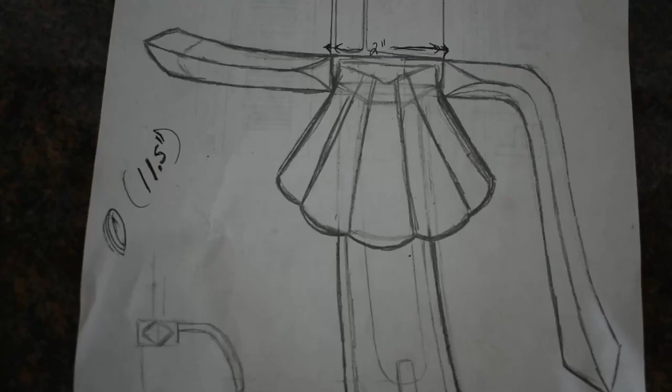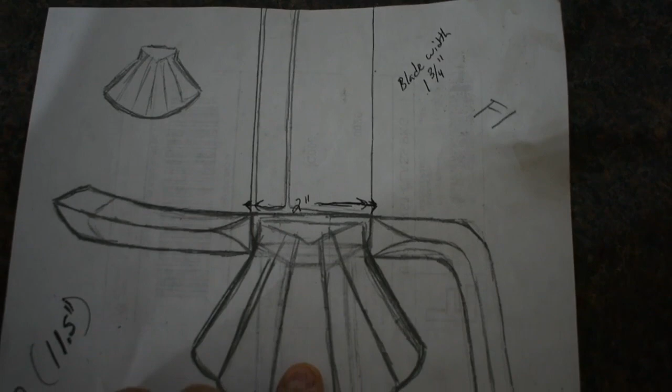Here's the guard design I'm going to use for the Messer sword. I've got a piece of 1-inch rebar in the forge heating up. The overall length of this guard is 11.5 inches, with the tang portion at 1 3/4 inches matching the blade width. This area here will be 2 inches. I'll do the clamshell later and weld it on, but that's the guard style we're going for. I'll probably forge it pretty standard square and then grind in the facet areas.

So that's heating up, let's get back out there, see if it's at temperature, and get to moving some metal.

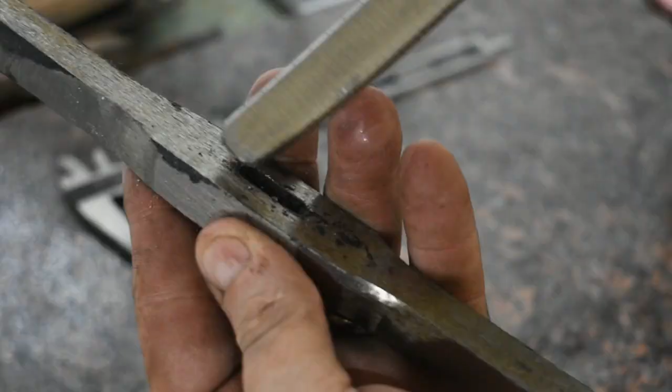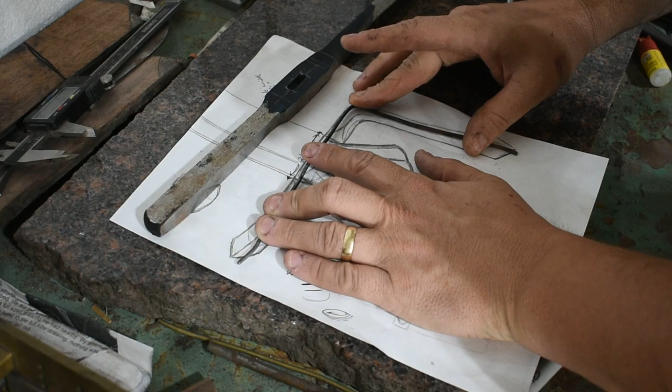Now that we've got the slot cut in our guard, I need to trim this to the proper length. I'll take this piece of wire and lay it on my drawing, bend it to fit the curve so I can get the idea of exactly how much material I'll need. Looks about like that. Now that I know I have enough, I'll straighten this back out and mark it here - that's the length.

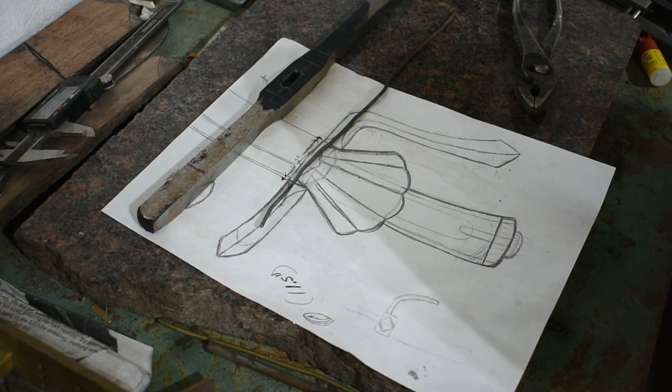Now I just need to cut these off, and then we can get to grinding in the detail. I'll cover it in blue Dykem first - you can also use a Sharpie, just anything so your scribe lines show up. Then I'll start removing material, get it shaped the way I want, run it through the grits, and move on to the next step.

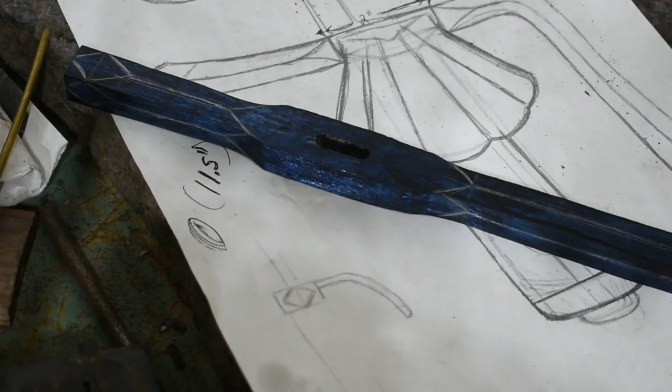You can see where I've scribed the lines to grind the guard, all in place and ready to go. I'll save you the boredom of watching me grind this and fooling around with a time lapse. I'll just go ahead and get it ground, and when we get back, we'll see what it looks like.

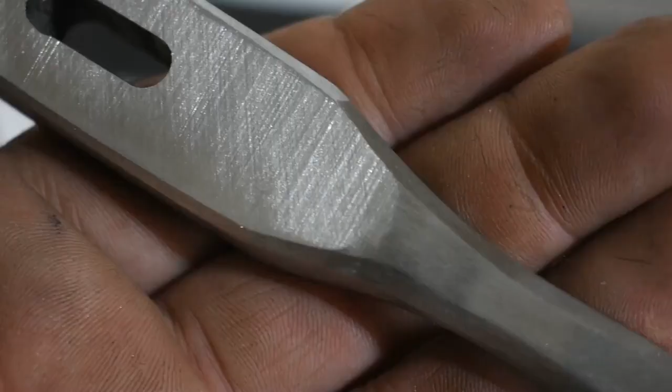There's our guard rough ground. I'll now hand sand it, get it cleaned up to the grits I want, and then we'll look into getting our clamshell stuck on here.

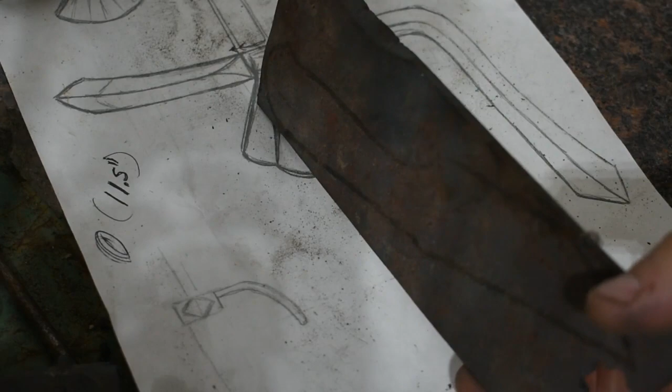Now that we've got our guard portion roughed in and ready for final hand sanding in preparation of welding on the clamshell, we're going to turn our attention to the clamshell. I think I'll use this piece of lawnmower blade, right at 1/8 of an inch thick, more than enough material to work with. We'll need to sketch it out, cut it out, file in the lines on the clamshell, and get ready to weld this sucker up. Let's get to work.

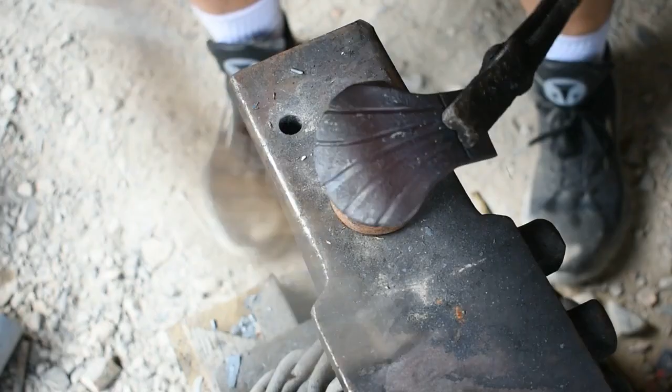There's our clamshell for the most part. I'll bring the guard out and take a look at it alongside before I weld it, in case I need to grind any more away to make it look more proportional. But it's turning out good so far - we're getting there.

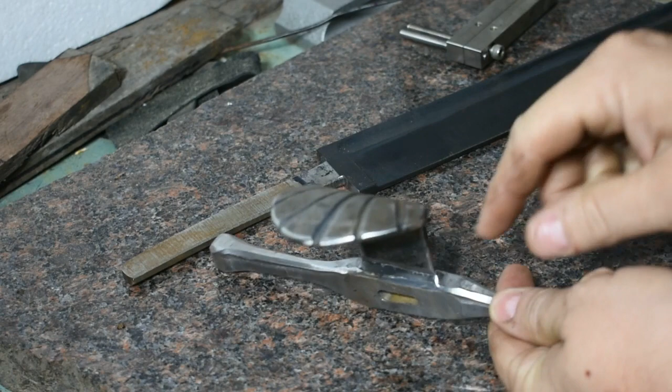This is where we're at with our guard. The welds took real well. I've still got some minimal cleanup, cleaning those welds up. I'm going to throw this back in the forge and bend these quillons just a little bit - there'll be some final adjustment when we get our handle material put on. But let's get this tossed in there and get an idea of what it's going to look like when finished.

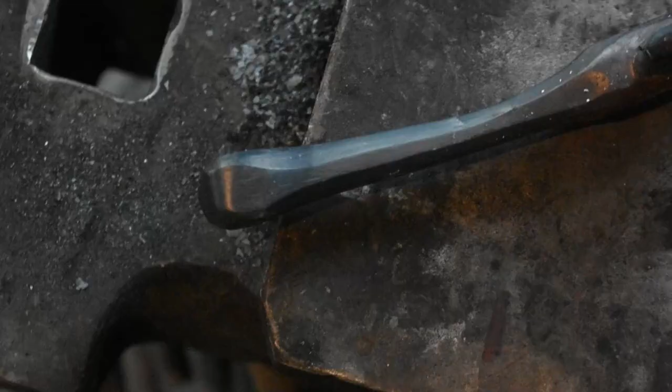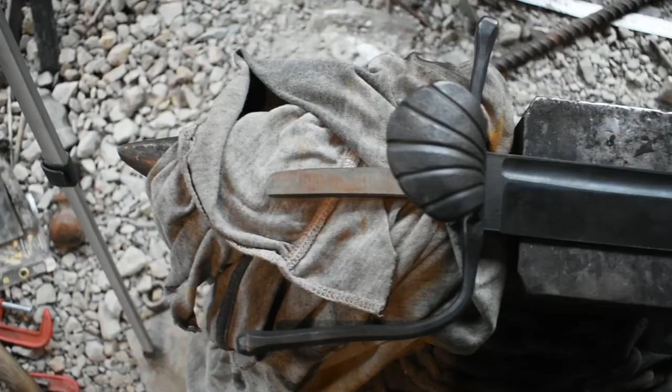There's where we are so far. Really happy with the way this one's turning out. Hate to say the other one breaking was a good thing, but this is turning out to be a lot prettier sword than the other one.

I still have to come in here on the next video. We'll grind into that guard and inset the blade down into it. By that point we'll have our handle material, get the handle fixed up, finish our bevels off, and we should have a finished sword.